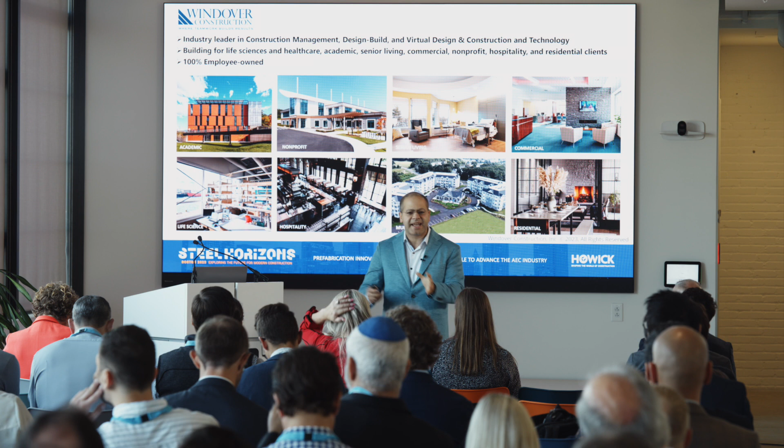So I'd like to introduce a little bit about Windover Construction. We're based in Boston. We build everything from schools, academic, life science, commercial, multifamily, residential, and we are really the go-to in New England for modular construction. We have built over the years great expertise in-house with superintendents, project managers, and a technology team that can push innovation and ensure certainty of outcome for modular construction.

We launched the IDEA platform 3 years ago, which stands for Innovations for Design, Engineering, and Automation. We wanted to extend our technology and leading edge services to a broader spectrum of folks in the industry. We work with architects, peer groups, construction companies, and manufacturers around the globe right now. We worked with Omniyat, one of the biggest developers in Dubai. We worked with Hickory in Melbourne, Australia, and around the US with laser scanning, drone surveys, and BIM coordination. We thought that's our platform to help push and provide and extend our services to everyone.

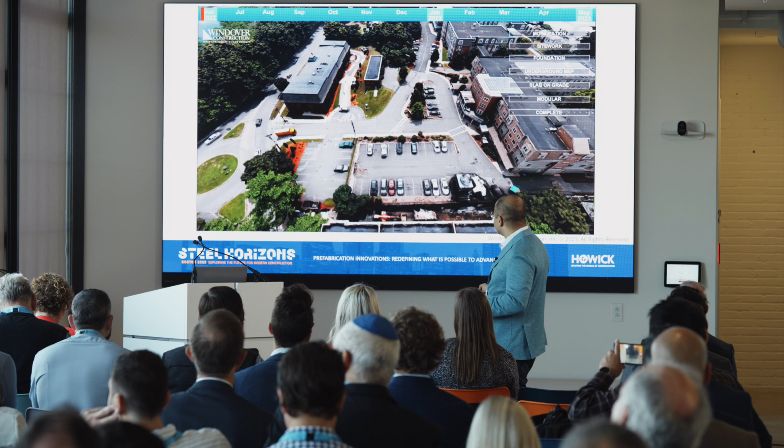I'm going to go through real-life examples of how we are pushing innovation throughout the life cycle of our projects. These are real examples with tight schedules and budgets, and how we are utilizing innovative solutions along the way to build more efficiently. This is a project in Somerville, about 30 minutes from here. This is a standard for our work.

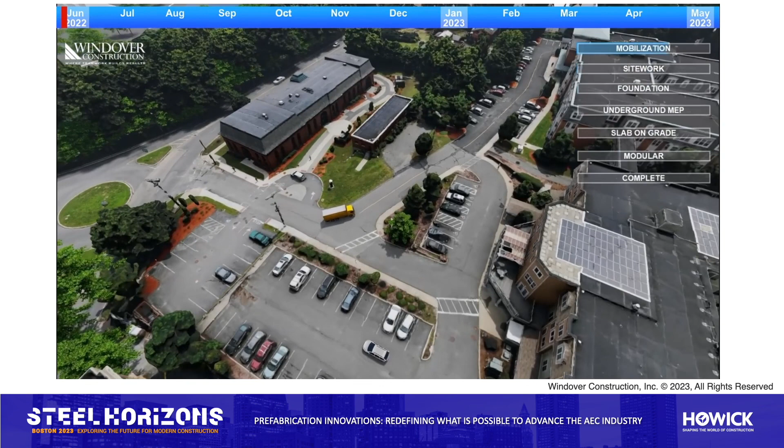When we start any project, whether it's modular or traditional construction, we start with a 4D sequence. We do it in 3ds Max. What we do is link it with the schedule's key milestones. This helps us understand the site constraints: when we bring those trucks with these modules, how we're going to fit them, safety planning, logistics planning, identifying discrepancies and clashes with existing utilities.

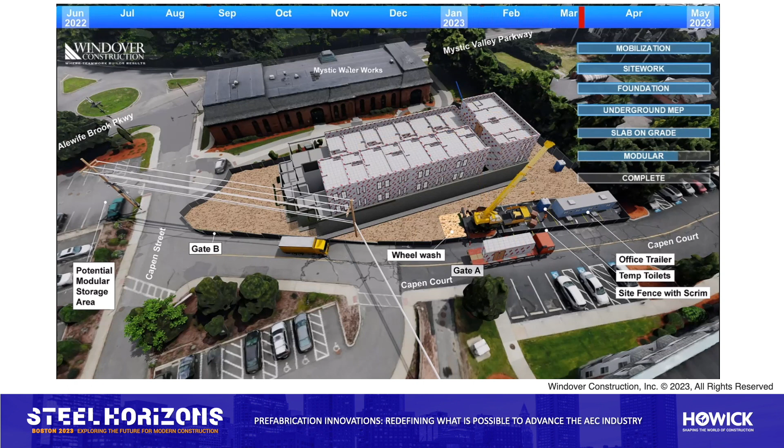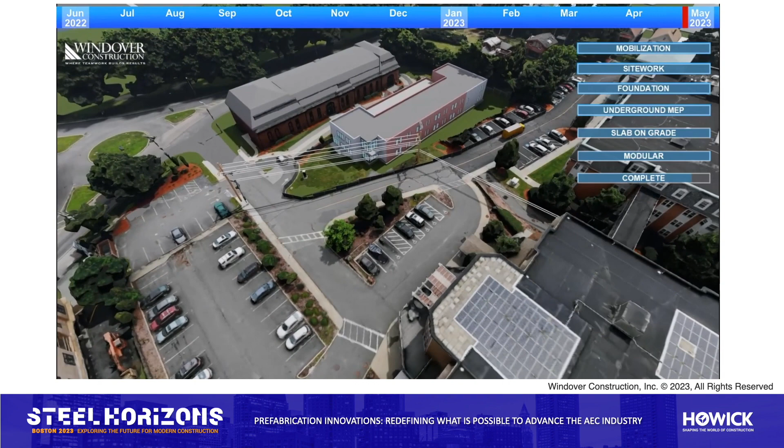So that's the best practice when we bring these off-site elements, figuring out how we're going to fit them on site, in addition to syncing to the schedule, to set expectations between not only our trade partners on site, but also the client and the city. This is a great tool to communicate with the city. What you see here is a drone-mapped scan of the site, not a model.

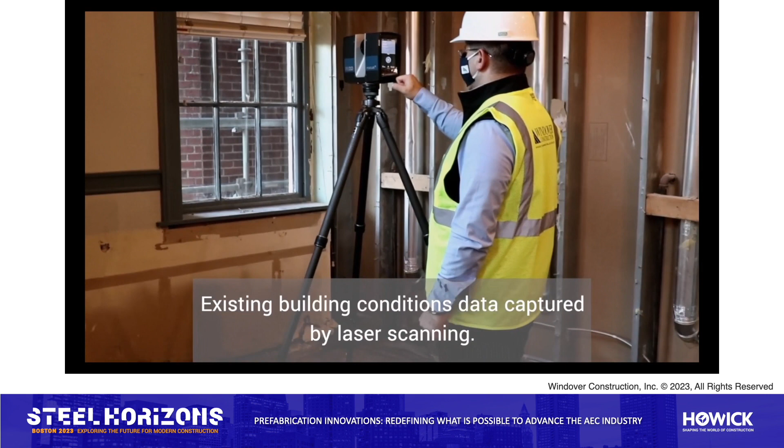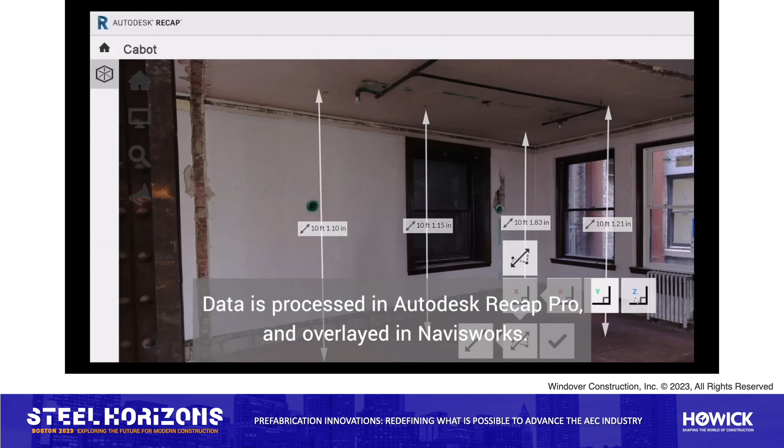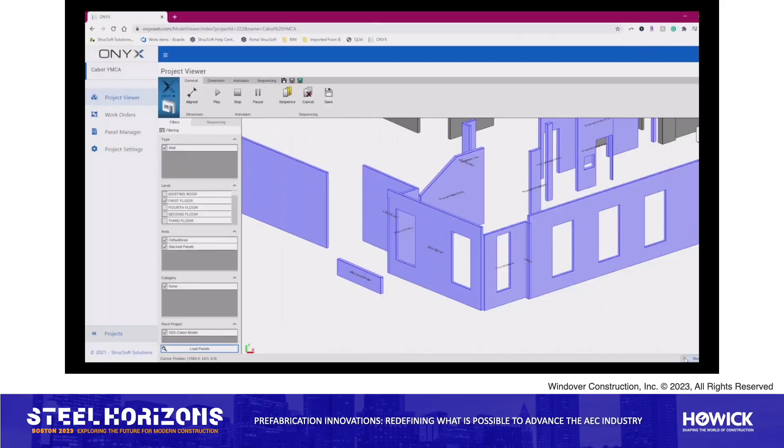What you'll see here is the power of telescopic technology: it can actually travel very small, like small Lego pieces, and when it goes to its intended location in a building, through very tight elevators, very tight corridors, it can maneuver through the spaces. When it reaches its intended location, it can expand and fit within any space. I call that adaptive industrialized construction - it can adapt to any geometry, and that cuts a huge amount of time on site without having to adapt and cut on site. It really increased safety on the job site as well.

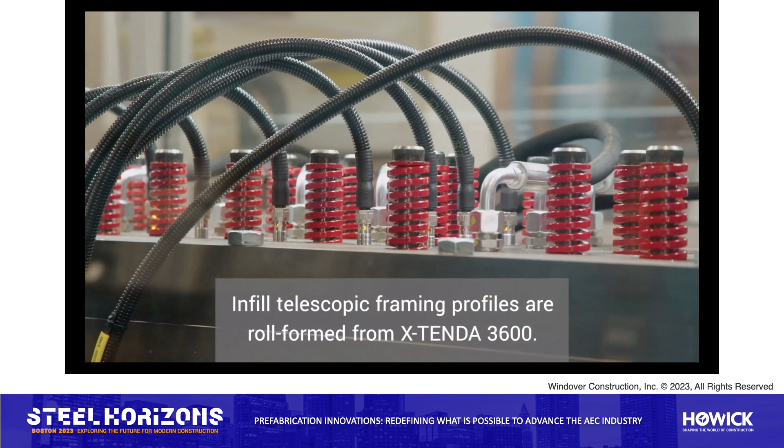You can fit out spaces very quickly and isolate areas. It can work with any fit out we wanted to do, with increased efficiencies.

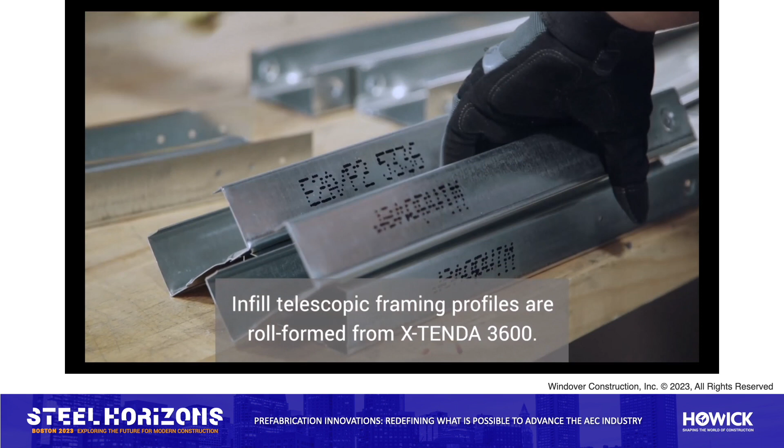As you see here, we did this at the Autodesk Technology Center. That was our factory, a really amazing team, and we assembled these pieces. When it travels to the site, it expands. As you see here, it can go very small.

We're actually working on a similar project right now. You see it maneuvering within tight corridors, going into really small elevators. It can really apply to any existing condition site, and when it reaches its intended location, it expands.

This is very powerful for our field team. We really loved this because it makes their job safer and much faster.

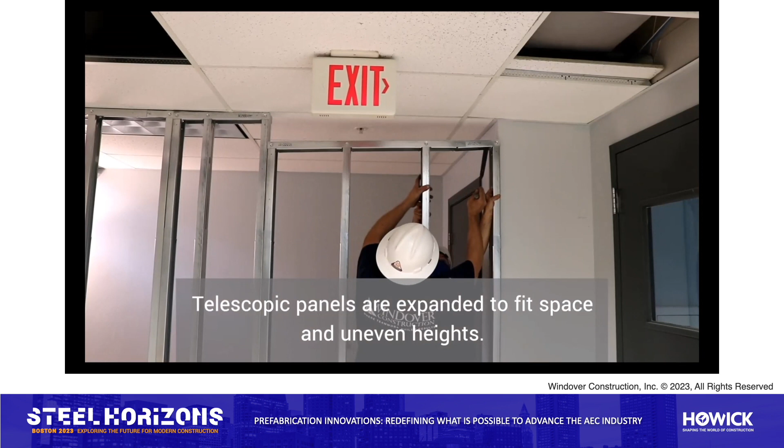What I really like about this technology overall is that it's very green. There isn't much waste in the material you produce when you use the Howick machines.

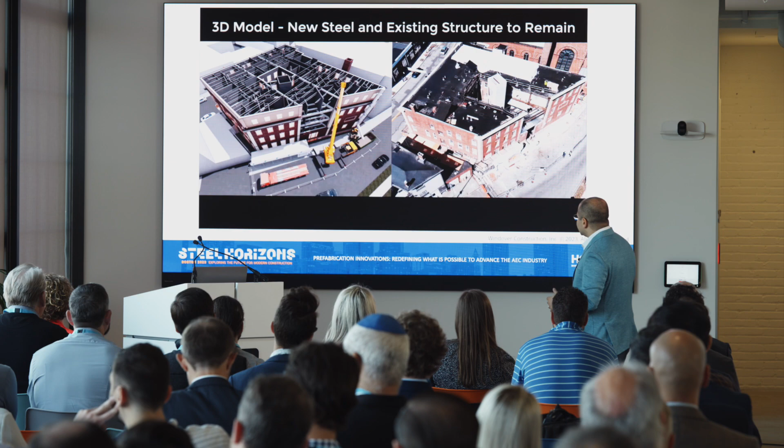This project also had a challenge. We had to rip off most of the inside and add new steel elements. So how do we make sure those steel beams, made miles away, would come and fit perfectly within that existing structure to remain? What we did is laser scan, you see that point cloud in Autodesk ReCap.

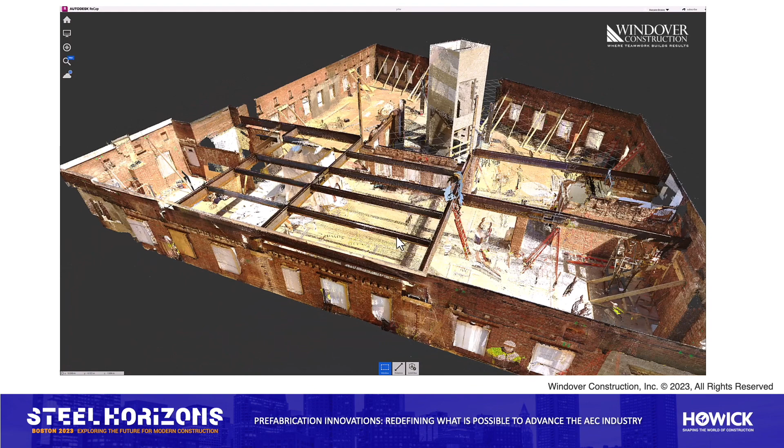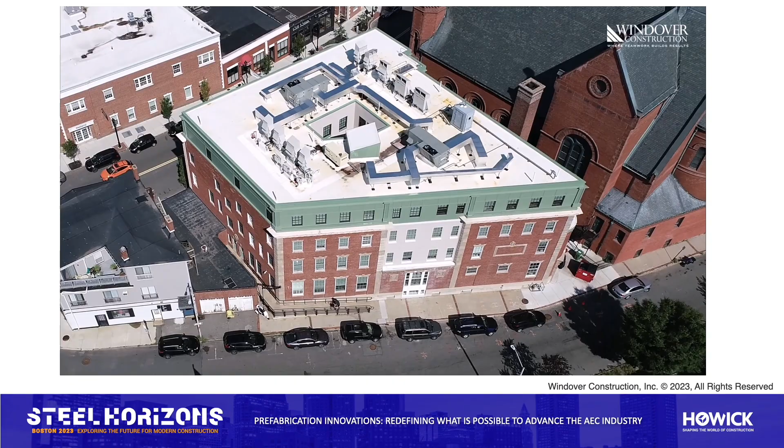And in Revit, we laser scanned the existing structure to remain, the facades, and did QA/QC overlays with the beams for the steel to make sure they would fit perfectly within the structure to remain. Another project we worked on is at Tufts University.

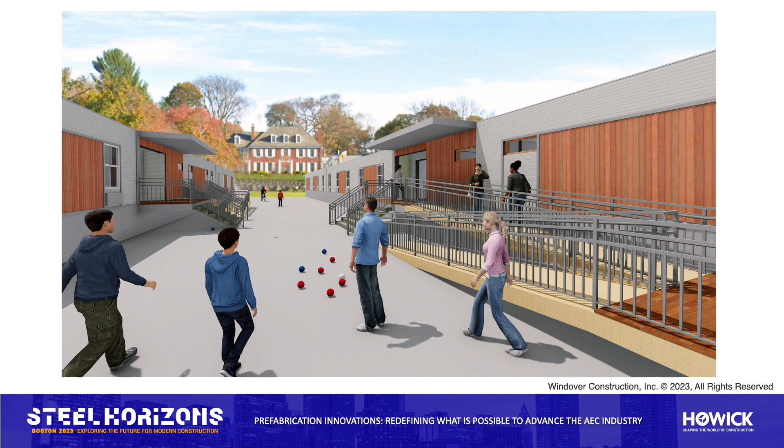This is modular. What we did is get involved early on the project, helping them test fit how these modules would fit on site.

As you see here, these are all the studies. We scanned the existing utilities on site to make sure we could coordinate very well in a short time to deliver that project and move toward certainty of outcome.

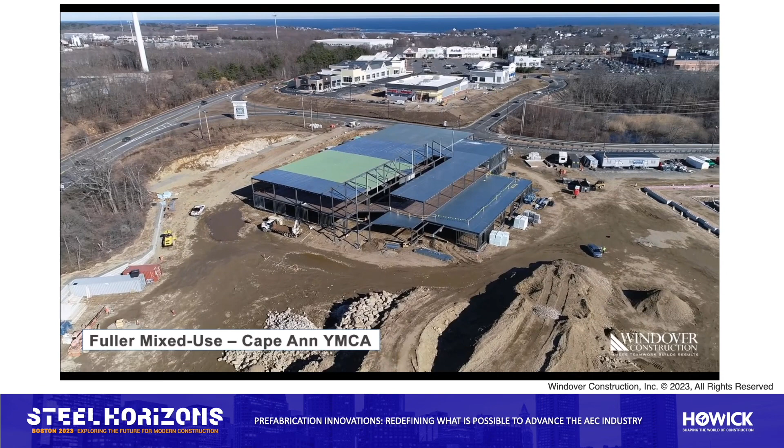This early modeling and test fitting is really important when we start working with the factories making the modules, to set expectations and work along with the design team, of course.

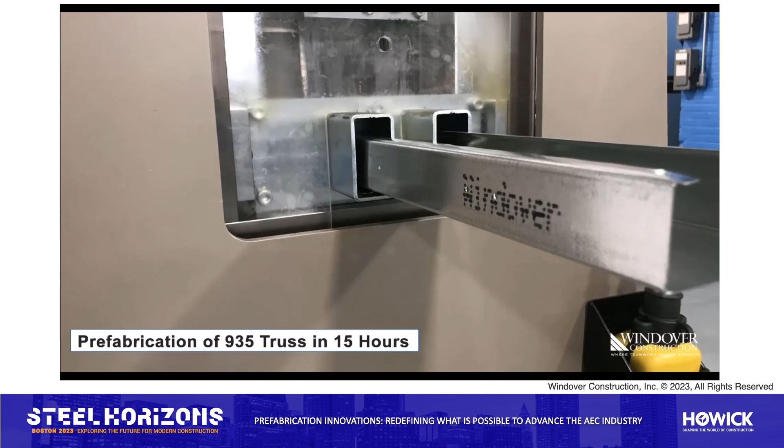This project needed almost 1,000 trusses, 935 trusses for the roof. What we actually did is collaborate with Autodesk and with Stud.io. We were able to create almost 1,000 trusses in just 15 hours using the Howick machine. So much efficiency there.

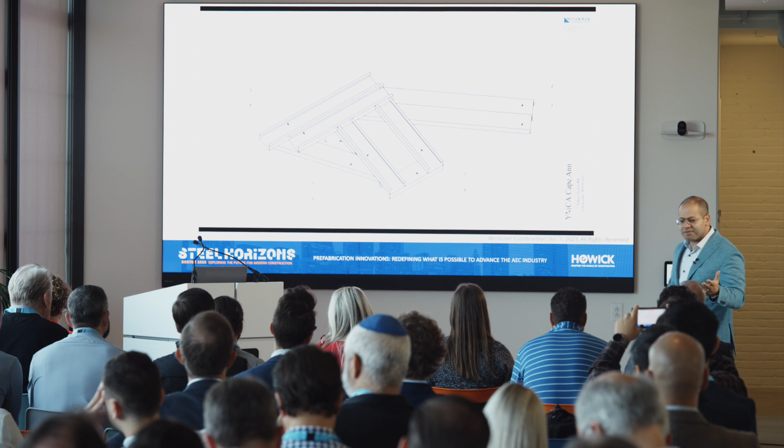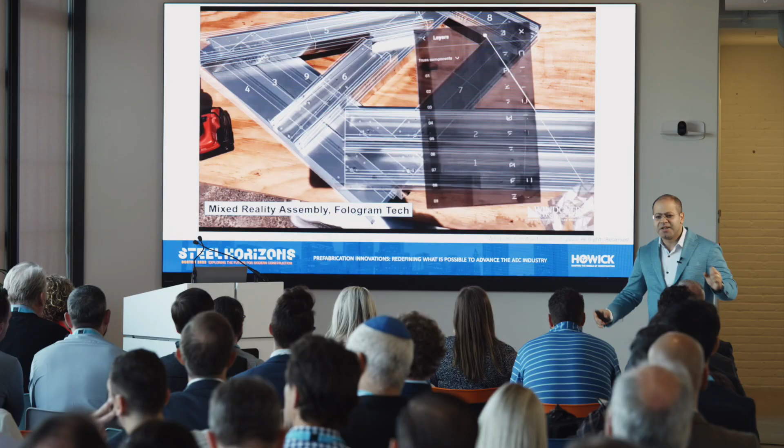For years, we've been using mixed reality to view how buildings will look in the future. But for this one, we collaborated with Fologram in Australia, and you can see how these collaborations were built here at the Tech Center, working with them and utilizing their leading-edge mixed reality solution using the HoloLens.

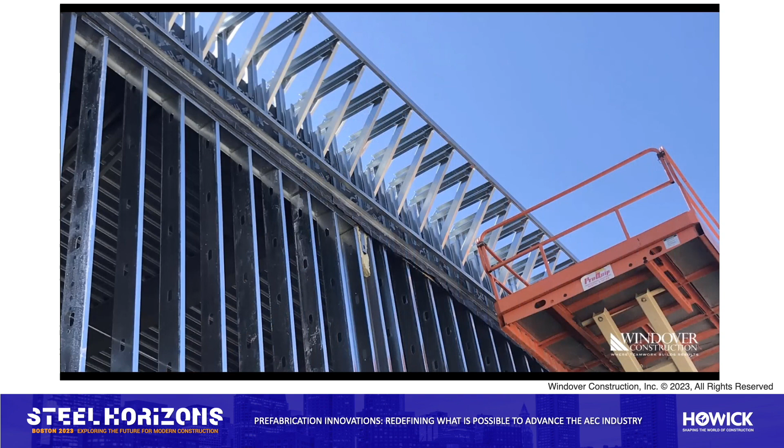It's like assembling IKEA furniture without having to look outside of the task at hand. It increased efficiencies, so they don't have to look outside. With that, we were able to increase efficiencies in assembling it, and it also brought so much fun to the job site. When we empower our field team with these technologies, it really enhances safety and efficiency and brings the fun to the site.

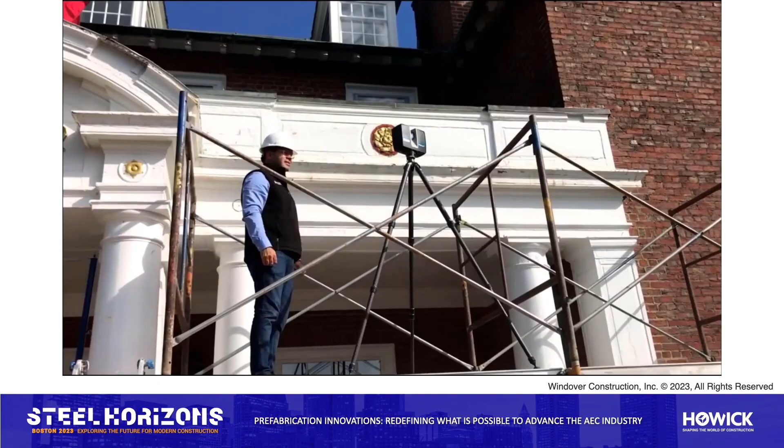We actually used additive manufacturing here at Autodesk. This is a historic 120-year-old building north of Boston. The facade was originally done in plaster. It was falling apart, and the client asked us to renovate the building and the facade with the most efficient budget and the highest quality we could achieve.

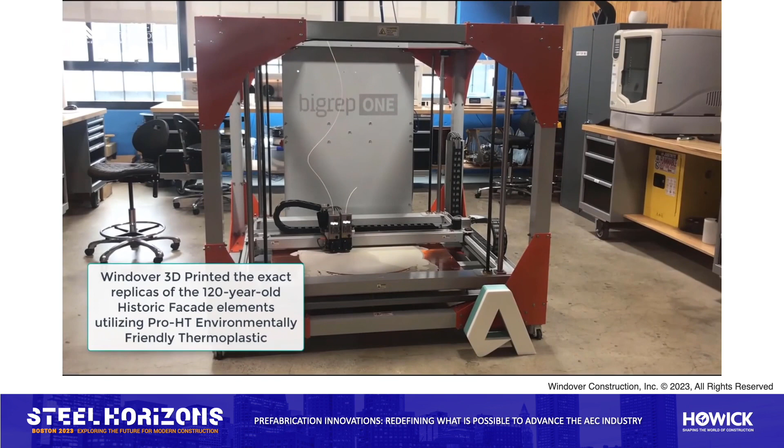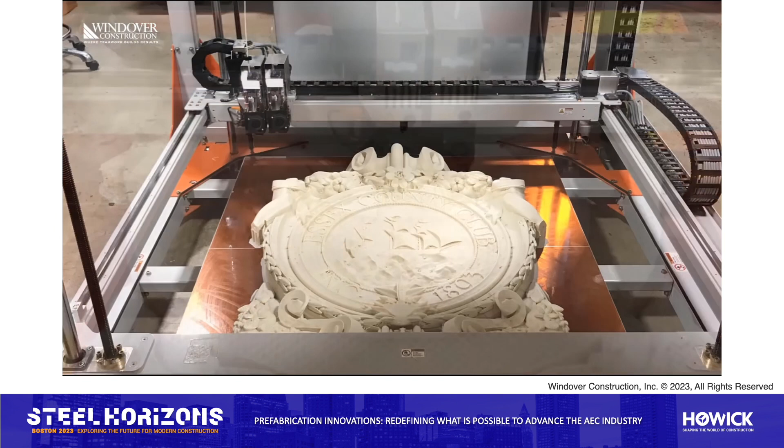So what we did is laser scan the facade and create a detailed Autodesk Fusion model to millimeter accuracy, because you carry over all the laser scan data versus traditional methods, and it carries over in the model to create exact replicas of these pieces.

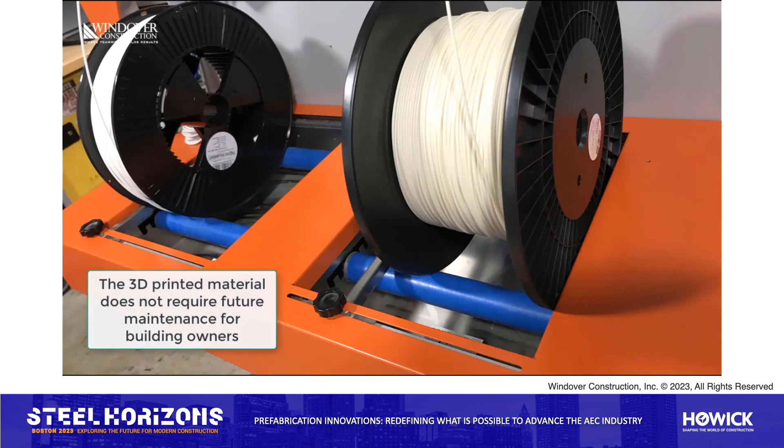We're able to 3D print some of these elements using the 3D printer here at Autodesk, using additive manufacturing, and it uses recycled material that would stand for another century with no maintenance needed. As you see here, it's also lightweight and very accurate.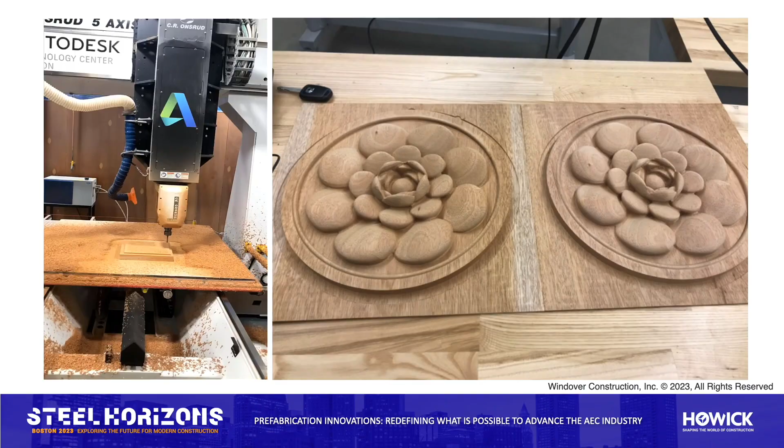This is an exact replica of how this facade looked 100 years ago, and everything above this column line was digitally prefabricated using a 5-axis router, beautiful small rosettes that were originally done by hand 100 years ago. We're able to create exact replicas of them using digital prefab.

So that's another way we can tackle the challenges of shortage in skilled labor. We unfortunately don't have the folks who can really do this by hand, and even if we did, it wouldn't be very cost effective—it would take a long time. With this, in hours, we can create exact replicas using laser scan reality capture combined with subtractive manufacturing.

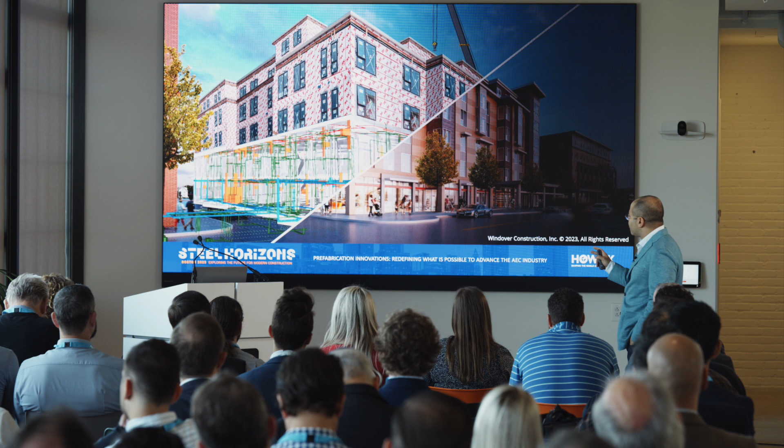This is another project showing how we can provide certainty of outcome for a project. This project won the EEC Excellence Award in 2019 for transforming how we coordinate modular construction on a job site. It's in Beverly, Mass., architected by S3 Design.

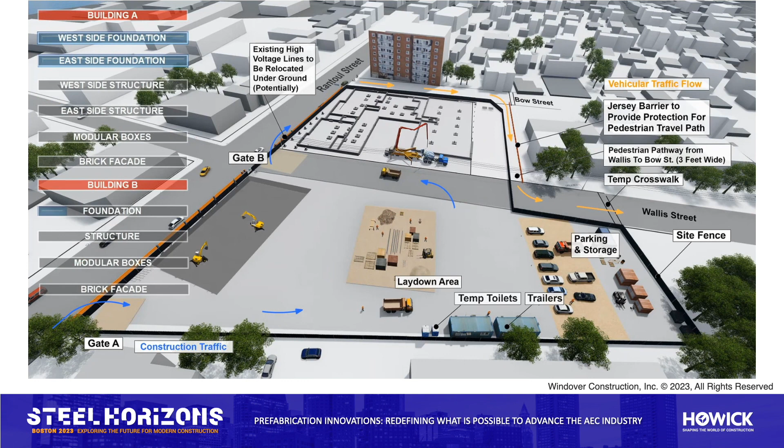What we actually did here is another 4D best practice for us, helping us plan projects early on in the process with key milestones, and helping with the city.

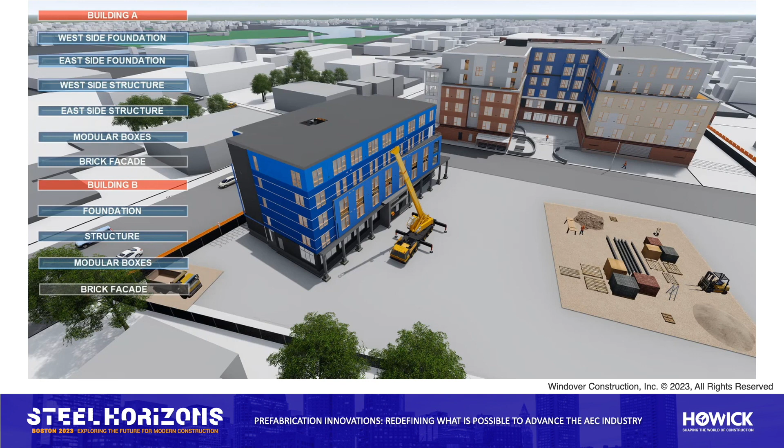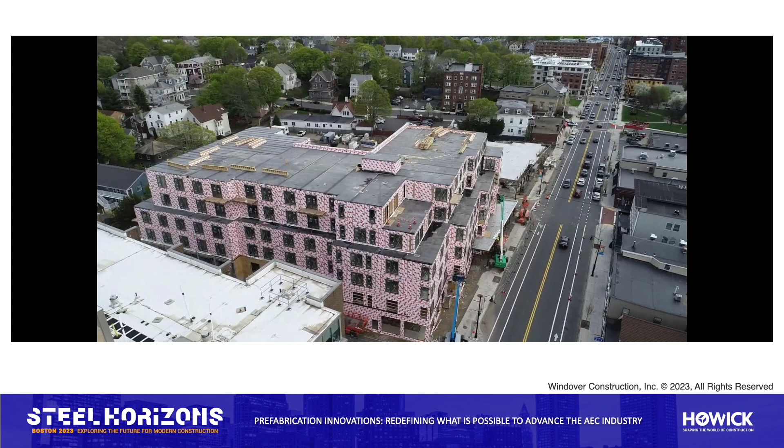The challenge on that job was that it has a podium of steel in the first 2 floors. The scale of this is huge. You have 2 buildings, building A and building B, with a steel structure at the podium and modular construction above. As a challenge of any off-site construction project, you want to make sure these off-site constructed boxes and vertical shafts will fit perfectly above the as-built components. So we coordinate between as-built steel, not just drawing steel.

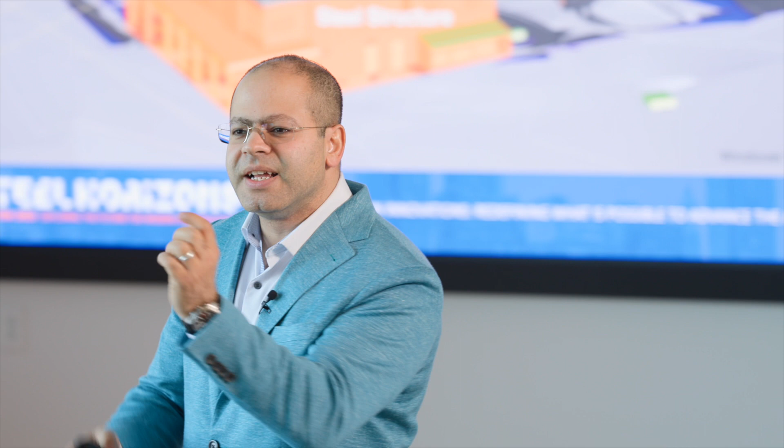After the erection of each steel phase, we laser scanned the steel and did QA/QC overlays in real time, communicating with the factory in Canada prefabbing those boxes. We told them, hey, your vertical shaft for MEP will hit steel by these 2 inches, can you edit them here? Then we made sure when those boxes arrived, all the vertical shafts with MEP fit perfectly on site. That's certainty of outcome using laser scanning.

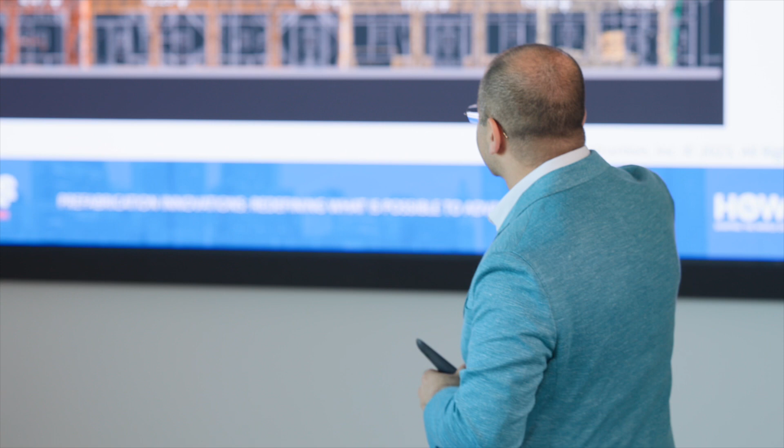This is another way we use Autodesk software innovatively. This is Autodesk Civil 3D. For years it's been used on a flat surface when we drone a site or capture it with a survey, creating a topo. What we did is flip it as a facade. We're able to detect the bulginess of that facade using the laser scan data, so we can communicate in real time to the facade folks how this facade is behaving after we placed all the boxes, making sure we preserve the design intent and everything will be smooth.

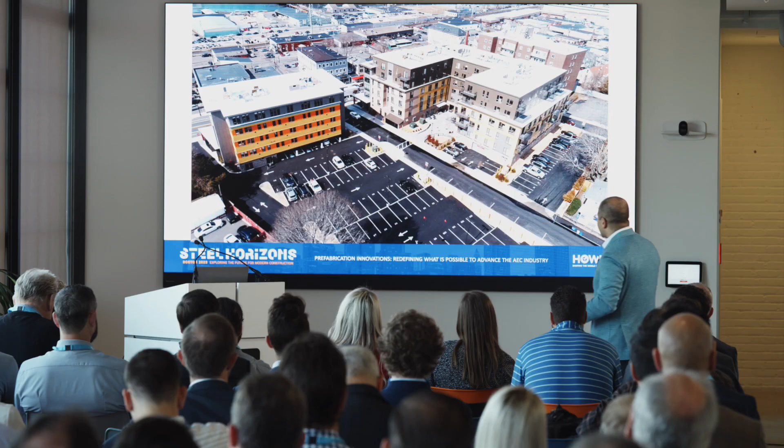This is a finished, beautiful project in Beverly, Mass.

This is a project at Dartmouth College. This beautiful terracotta is coming from Spain, the glass was coming from Germany. It's actually built upon a structure to remain, a 1970 building I think.

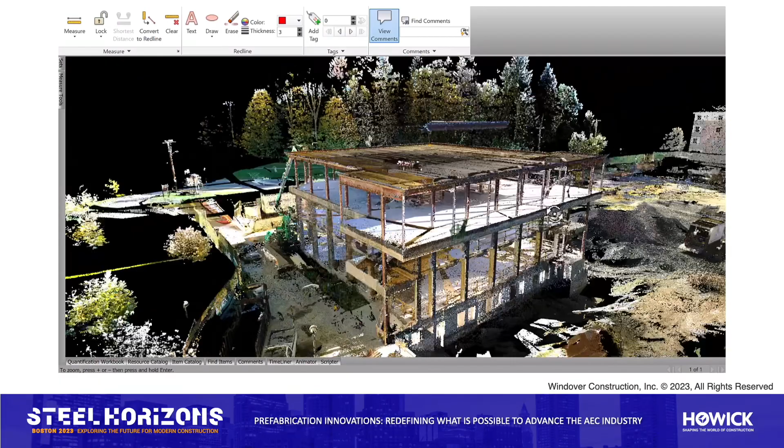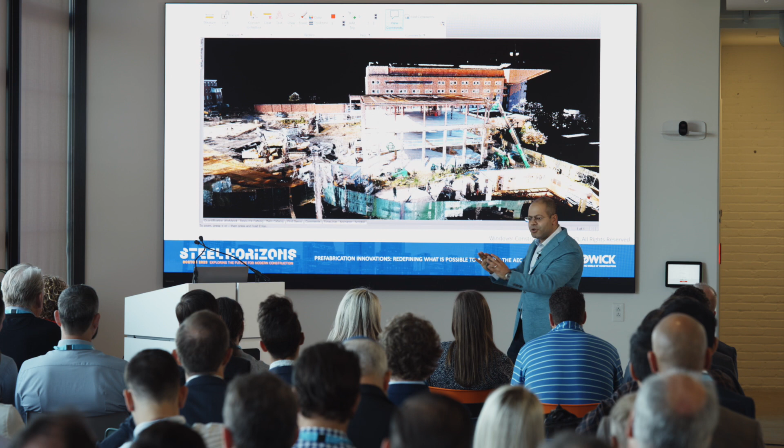After we stripped off all the details of that building, we laser scanned the whole structure to remain and did QA/QC with overlay against the design drawings. We communicated, hey, that 30-year-old structure is not a perfect square. Communicating these small discrepancies with the design teams, you're able to adjust the drawing, so when these facade elements arrive on site, fabricated off-site, they fit perfectly on the existing structure to remain.

The constant communication and QA/QC using laser scanning reality capture with BIM is really key here.

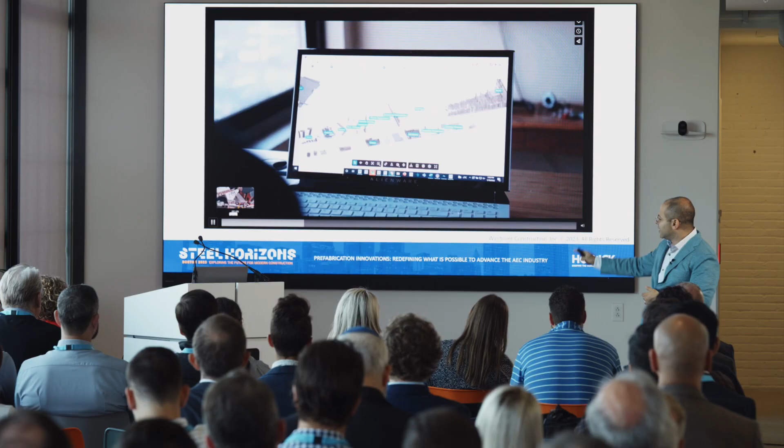This is another example. We collaborated with Autodesk Takeoff, great friends of ours, using models from design drawings to expedite the quantity takeoff process. Details and virtual mockups are very important early on to make sure how these prefab pieces will put together in the field, and it helps communicate with our trade partners on site.

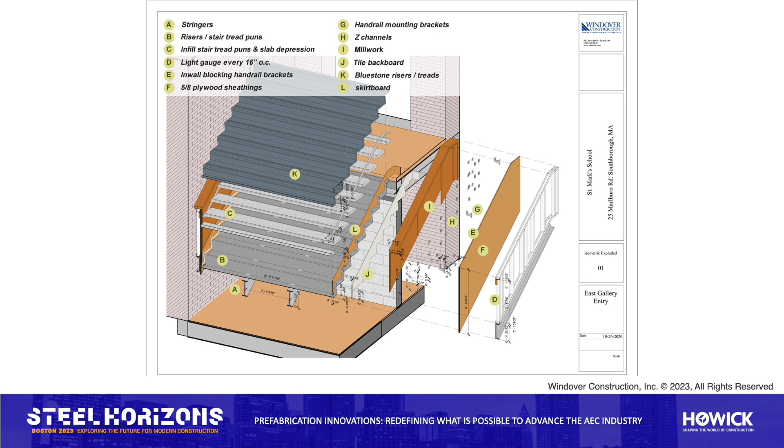This is QA/QC overlay. Whether it's a modular construction job or a traditional method job, built with any other method, it became a standard for us to do this.

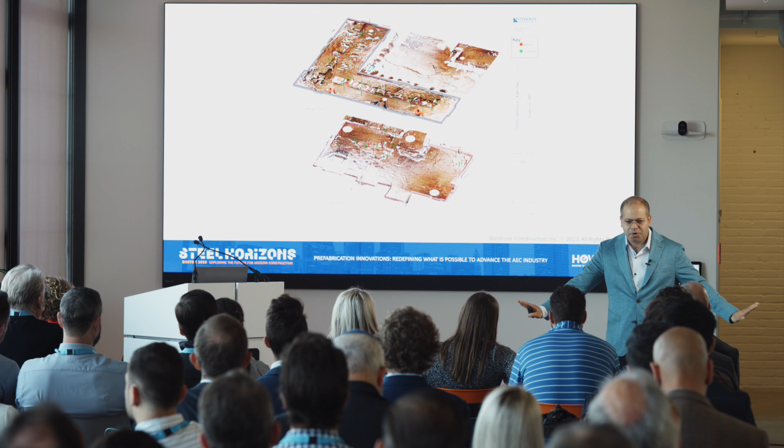After we put QA/QC overlays, after we put all the underground pipes, we laser scan, whether with a LiDAR drone with ground control points or a laser scanner on the ground. We scan those pipes and vertical risers, and do QA/QC overlays to make sure every pipe underground will meet its intended location on the first floor. Imagine that's before we pour concrete, because once you pour concrete it's really hard to break into these, causing delays.

So the whole purpose of our work as tech-first solutions is really to make sure there are no surprises on the job site. That's the whole purpose.

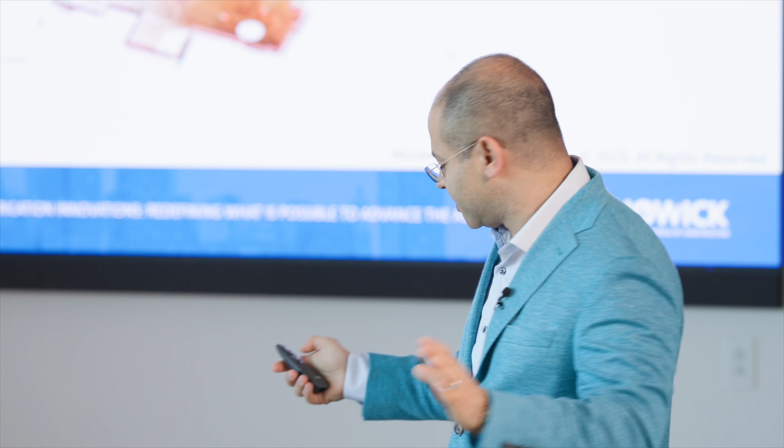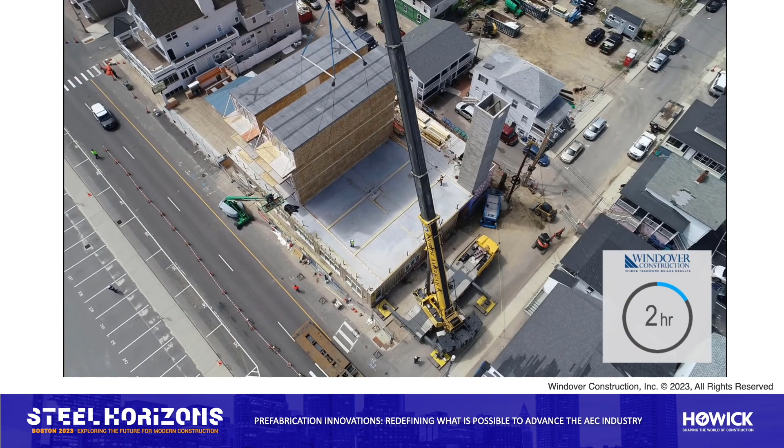This is a beautiful building that came out in 8 hours on site. There's a time lapse of it. It was assembled on site with modular construction in only 8 hours. This was during COVID, and all these trucks coming from Canada with boxes really needed to finish the job within a day or two at most.

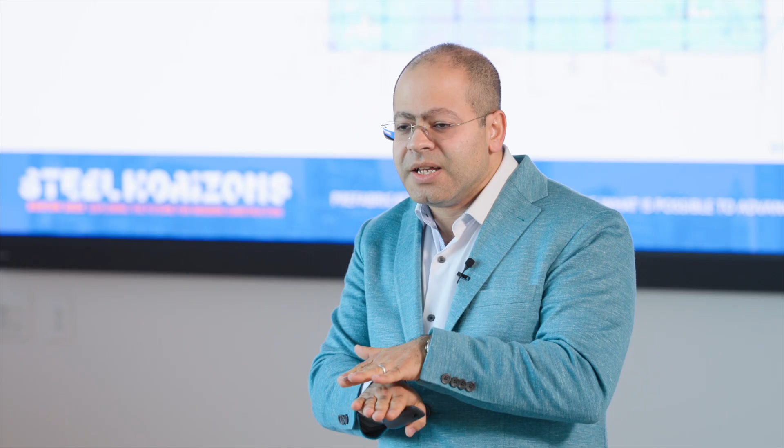So to achieve certainty of outcome, after we put this slab, we had to confirm the flatness of the slab was within half an inch. How do we do that? Again, laser scan of the slab, and in Civil 3D get spot elevations, and communicate that in real time to the field so they can make any necessary adjustments.

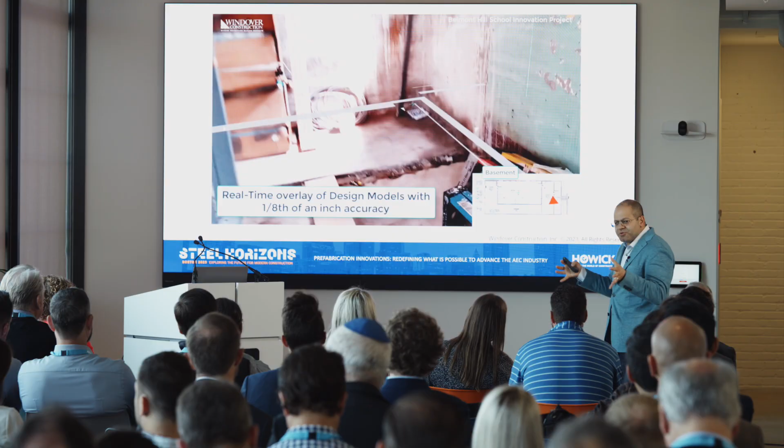That's a twin build we use with our friends in Australia. It's got these codes bringing really good accuracy, and we use it for pre-assembly, like you see that millwork getting prefabbed outside.

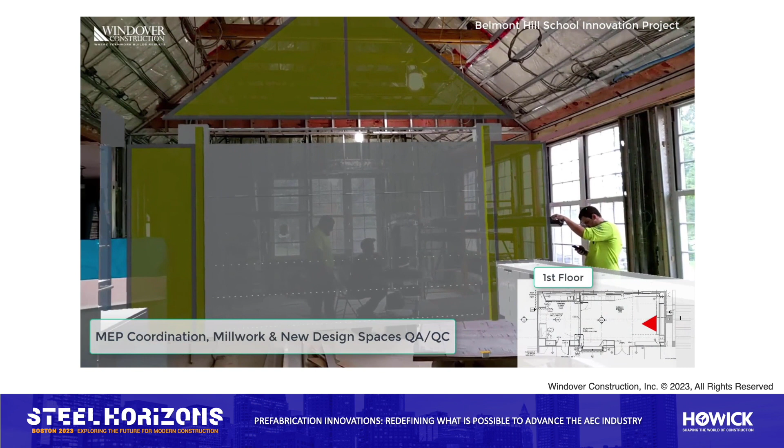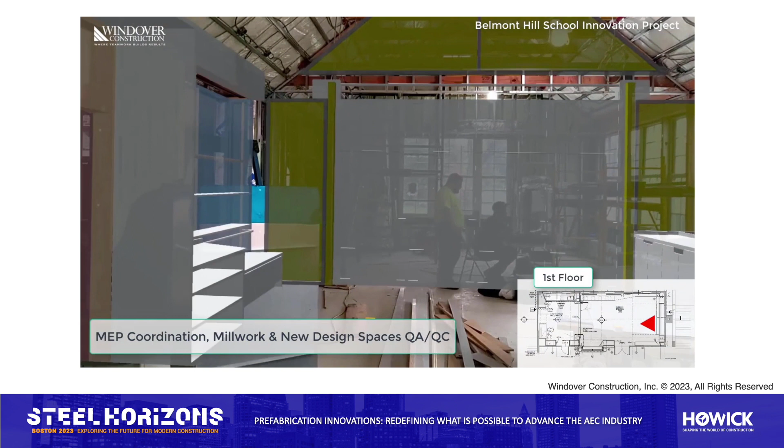This is an innovation space we built at the Belmont Hill School. As you see here, we wanted to communicate and overlay the 3D models for coordination purposes in the actual space, to make sure everything will fit perfectly when it arrives there.

And we use it for MEP systems as well.

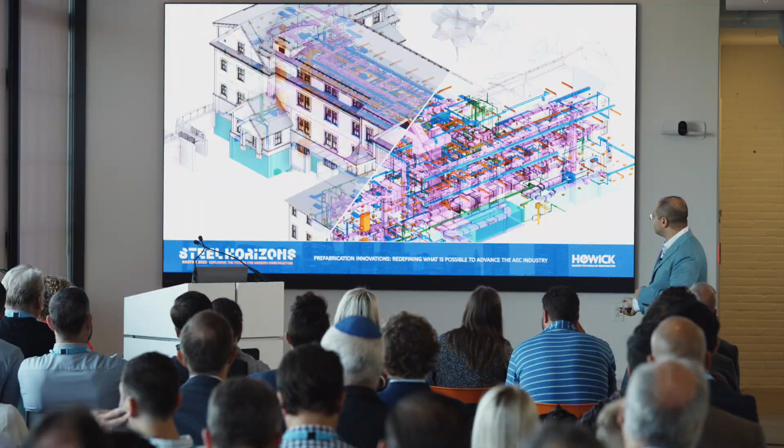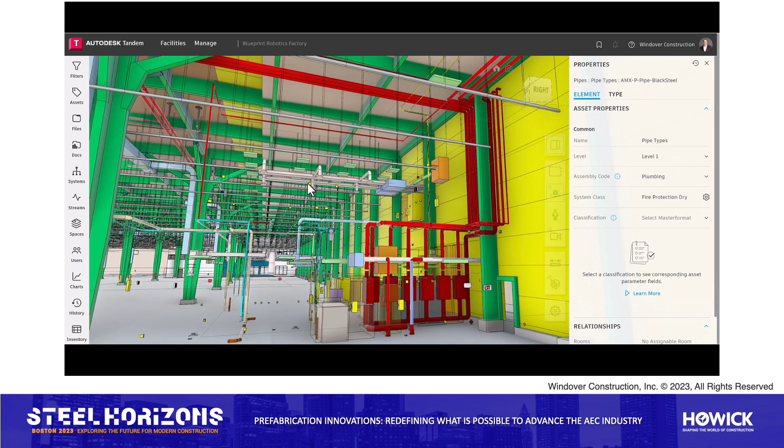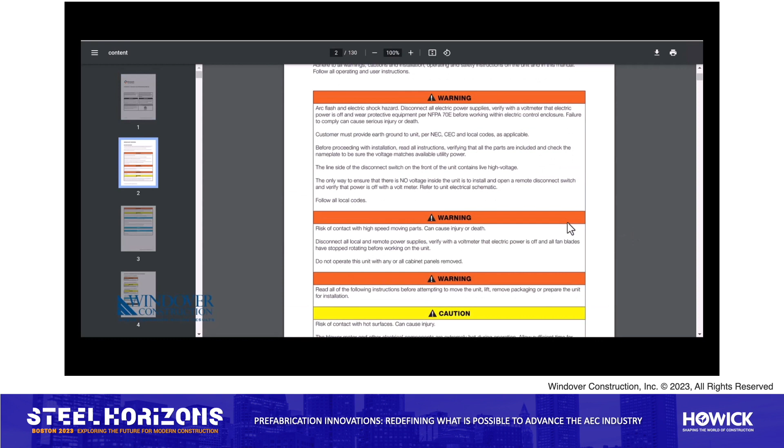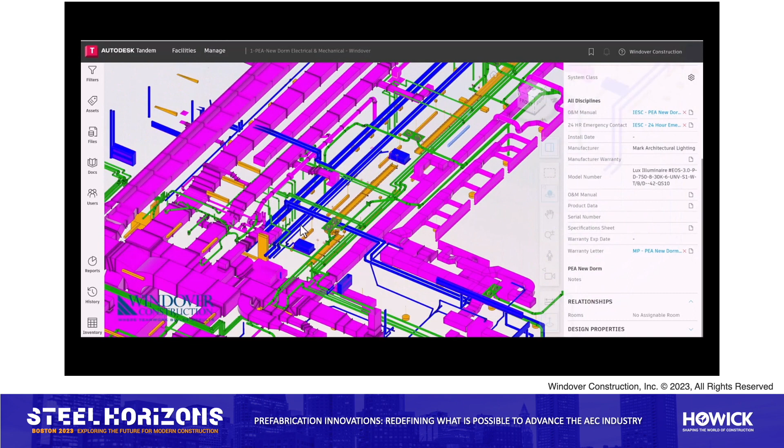They can use this data at their fingertips, with their iPad or computer, to really monitor the building. We're adding IoT sensors at Phillips Exeter Academy, and they have all the O&M manual data, so they can support future facility maintenance and management. This is information-rich data at the fingertips of clients who don't need to be BIM experts. It's transforming our handover process, which for years was about books no one wants to read. This is very easy to use, requiring no training. We used it at Phillips Exeter Academy, and it's been a success story. The facilities team there loved it.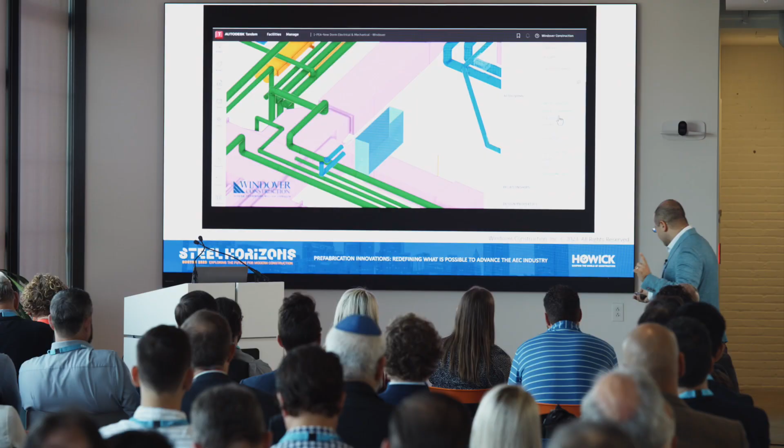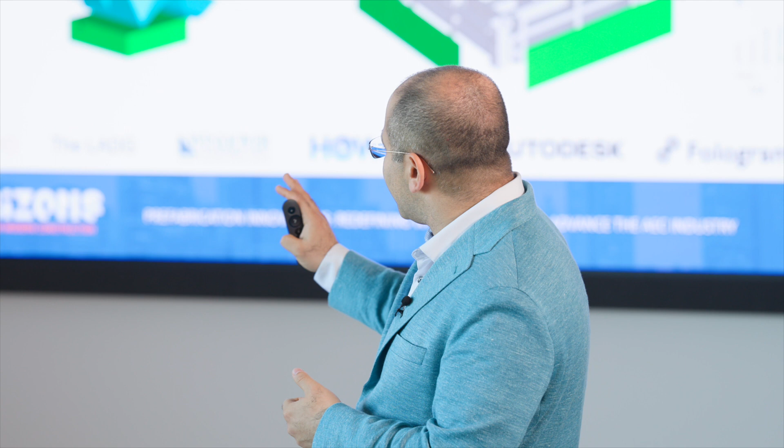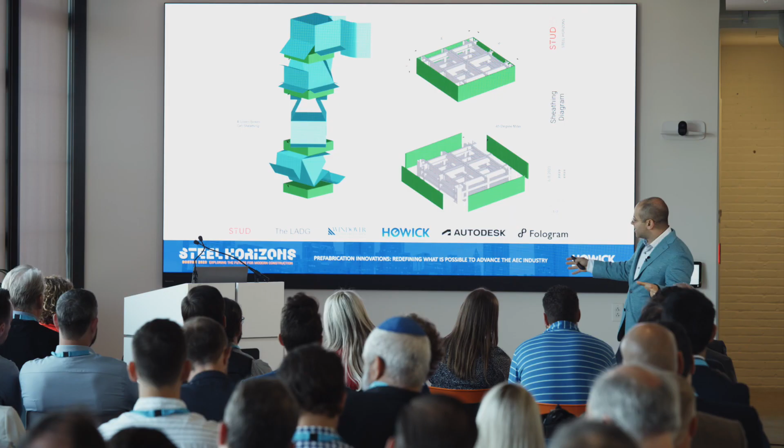One more thing: we're collaborating with Stud.io, the LADG team, Howick, Autodesk, and Fologram, our friends from Australia - they wish they were here. This is really about exploring new ways and redefining what we can do with light gauge steel, taking fresh ideas and applying them with different technologies. Using Fologram to assemble it, using amazing Stud.io StudFinder software that's compatible with all our everyday software, it's redefining what's possible. The most important thing is using technology to offer solutions for the challenges we face every day on job sites. It's a collaborative effort between the superintendent on site, project management, the technology group, great folks like Autodesk pushing the industry, and manufacturers like Howick. All together, we can advance our industry through these collaborations.

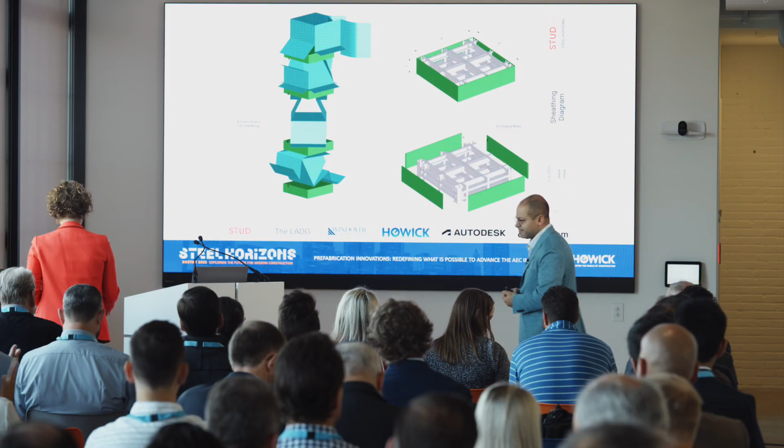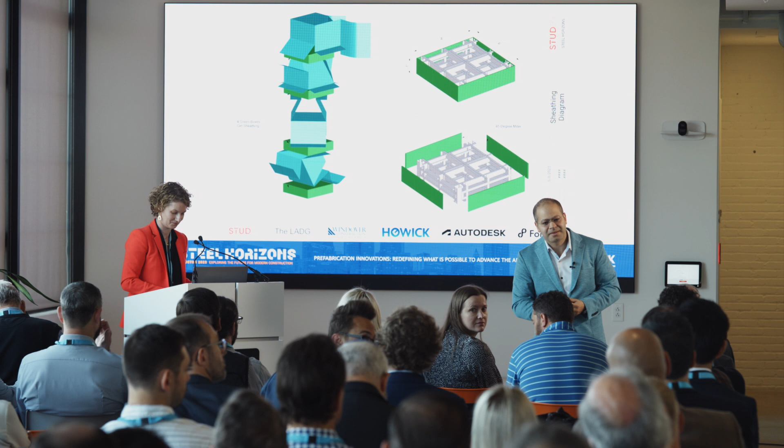The question is, how much does the scanning impact the production facility? Meaning, the premises in the offsite, things start way ahead before the on-site itself. So if you're scanning and there's a module being built, or multiple modules, and a shaft changed 1.5 inches, how is that synergy going on?

You're bringing up a great point. That's why you'll find me saying real time all the time. In the canvas example, while they were making the boxes in Canada with our partner there, we communicated this information the same day. The power of laser scans is that you can process all this data in Autodesk Recap in about half an hour to an hour, do all the QA/QC overlays, and have a quick Teams call with the factory to tell them what we found on the steel at the site. So the key is real-time communication - if you give them this data two days later, it's not good, they won't really use it. The power that's empowering us now, with laser scanning technology advanced by LiDAR drones, is that you can process data very quickly and communicate it to the factory in real time so they can make adjustments according to the findings.

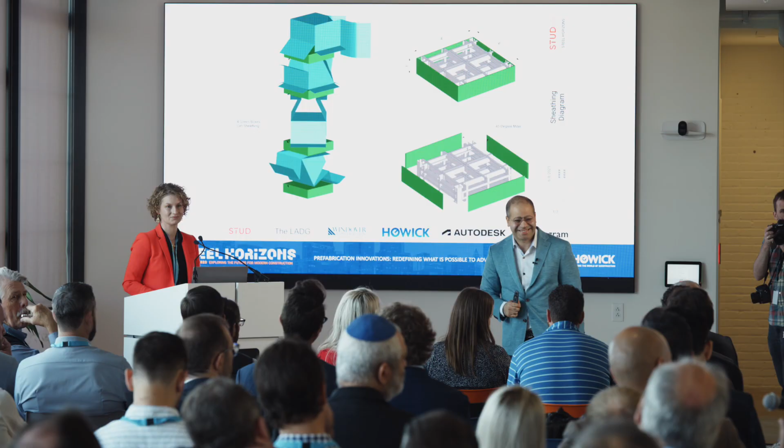As the construction manager, do you have some kind of buffer on your schedule to account for those things? Because I know it's going to come down to liabilities and delays and all kinds of issues - I'm the fabricator in that supply chain. So who's the one to blame if things go wrong? Oh no.

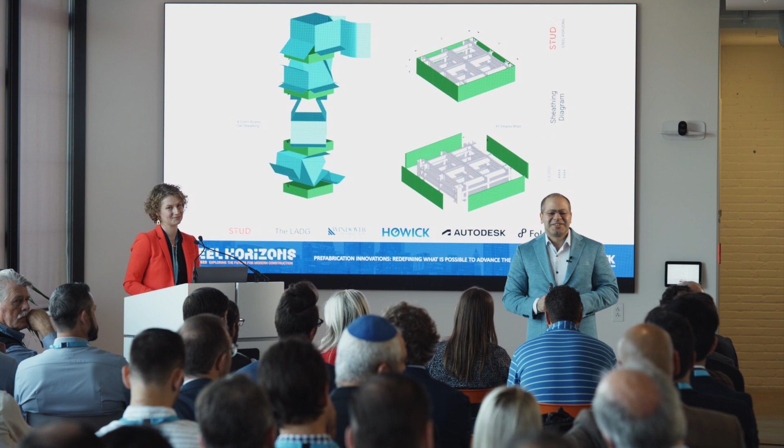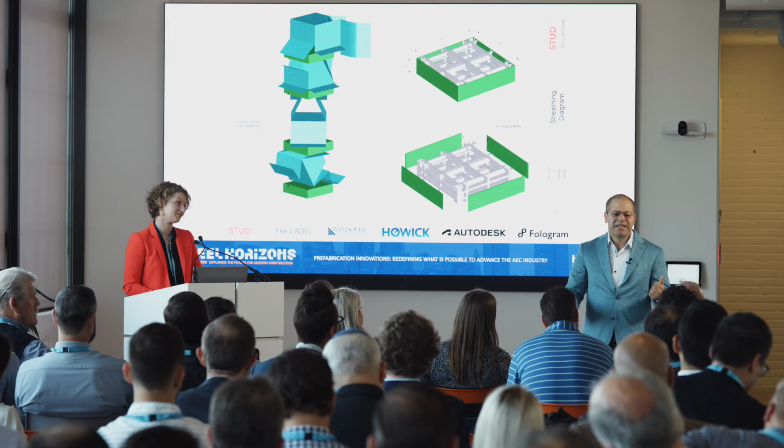Right now, the laser scanners we use, Faro laser scanners, get calibrated all the time - you have to trust them. It's one of the best scanners we use, with accuracy within 1 to 3 millimeters. We process it in Recap. But here's the thing: right now we see it as a collaborative effort, not about blaming you or me. We all assist each other to find discrepancies early, so we do the best we can to avoid any surprises or delays on the job site. It's all about combining different technologies - you have reality capture, including drones and laser scanning, the BIM where you do QA/QC overlays, the prefab factory who know how to fix these things on their end, and the design team who is forward thinking and provides these design models to us. It's really achievable when all these partners work together in an open, transparent, collaborative environment - that's how we can really make this work.